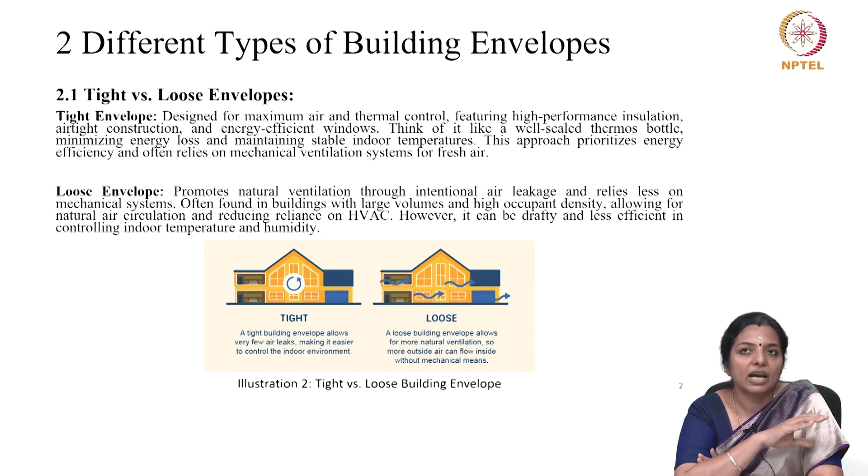So, let us look at this. There are two different types of building envelopes. One we call a tight envelope, and that is designed for maximum air and thermal control. Now it has very high performance insulation, airtight construction, and energy efficient windows. Think of it like a well sealed thermos flask, minimizing energy loss and maintaining a stable indoor temperature.

This approach prioritizes energy efficiency and often relies on mechanical ventilation systems for fresh air. Now, when I talk of all this, I have approached it from the point of view of the outdoor being very cold. Have the same analogy to understand what happens when the outdoors is very warm. The other one we will call a loose envelope.

So, a loose envelope promotes natural ventilation, it's porous, and it promotes breeze movement inside, which is actually an intentional air leak, and it relies less on mechanical systems. This is often found in buildings which are large volume and high occupant density, allowing for natural air circulation and reducing the reliance on any active means of heating or cooling like HVAC.

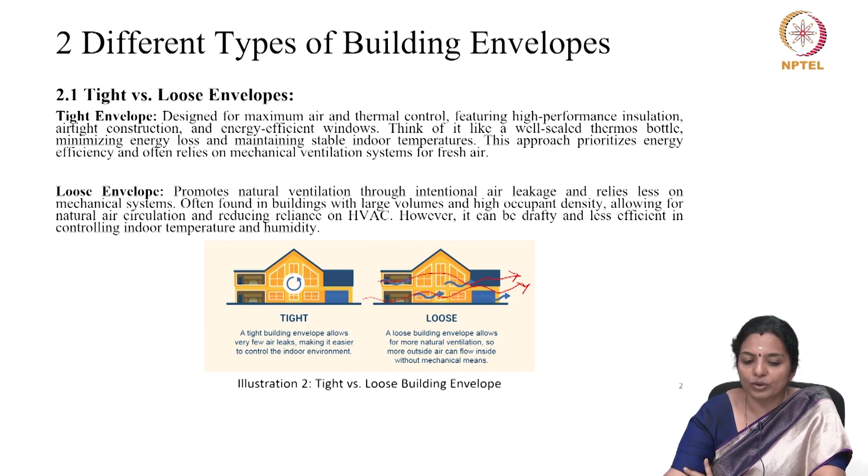Whereas there is another way in which you can see, and that is static and dynamic building envelopes. Now the building envelope comprises of walls, roofs, and all that is there on the walls, which is windows, ventilators. And these play a very critical role in the building's energy performance and an occupant's comfort.

Traditionally, envelopes have been primarily static, like how we use in our regular building. You have a wall, you have a window, you are privileged to have an operable window. When you want, you open the window. When you do not want, you close the window. When you feel very lazy, even though you have to open the window, you keep the window closed because you have to take an effort to go and open the window.

So, traditionally, these envelopes have been primarily static and they employ fixed elements and materials to achieve thermally comfortable indoors or to have a thermal control. So if you find that hot breeze is getting inside, you close the fenestration or the window. However, with increasing focus on sustainability and adaptability, now dynamic building envelopes are emerging and they are becoming a game changer in today's advent of technology.

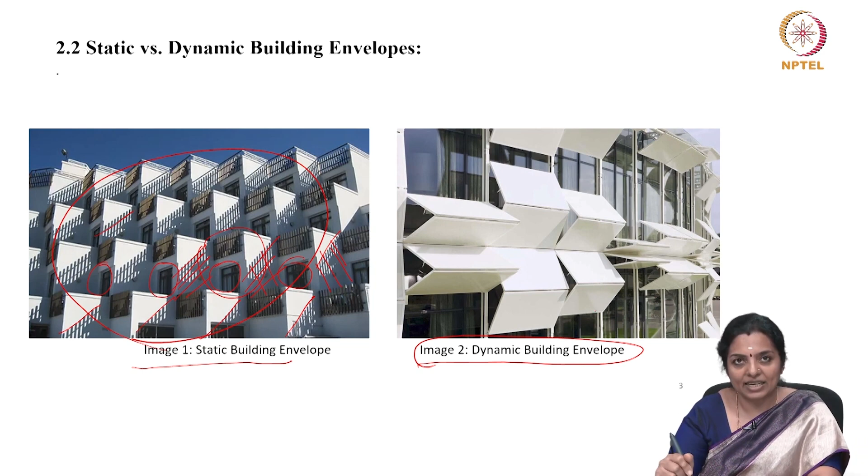Whereas now you look at the adjacent picture, which is the dynamic building envelope. Here you can see that the building has certain elements which are dynamic and movable. So the elements are movable, dynamic, and these can be made to move based on the daylighting and shadow, solar gain requirement.

Suppose it's a winter month and you want solar radiation to enter inside, all the windows could become as in this shape. Number 1, giving maximum exposure to the wall and allowing maximum solar radiation to come in. If you want to control the solar radiation, you can go in for option 2, where it is controlled. The area of the window through which solar radiation can enter inside is controlled.

If you want further control, you can go for option 3. And then if you want very less solar radiation and some amount of light, you can go for option 4. If you want very, very minimal or almost no solar radiation and extremely less daylight, then you can go for option 5. When I say you can go for, I mean to say that the facade chooses based on how you program it to allow optimization of daylighting and solar gain. So you have optimized ingress of solar radiation and daylight.

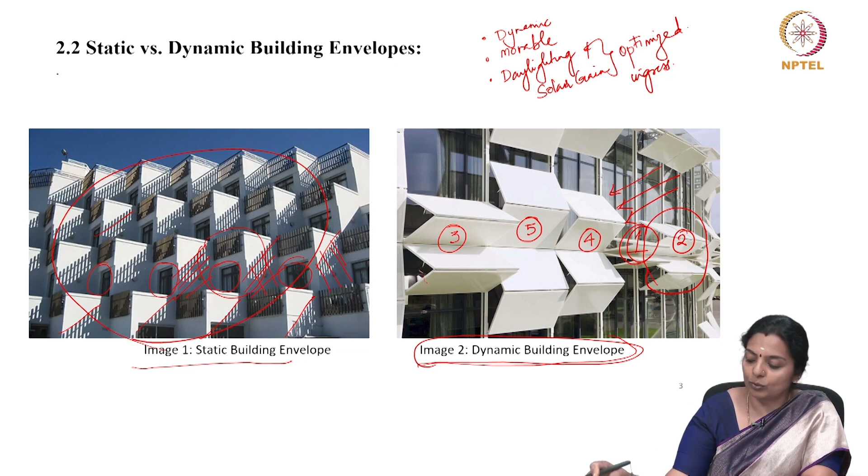Right. So now a static envelope relies on fixed materials and elements. That is, it has the traditional way in which buildings are built. It has a fixed wall, fixed windows, fixed shading device, and if you need any insulation, it is fixed, and it regulates heat transfer and light penetration based on the natural way in which solar radiation will enter in.

It comprises of high performance materials in the form of insulation to avoid infiltration, like fiberglass or rock wool or foam, and it minimizes heat flow through the walls, roofs and floors.

Now, airtight construction is done by sealing the gaps and cracks, and it prevents unwanted infiltration, and therefore the thermal performance gets improved. Energy efficient windows can be installed by having double or triple glazed windows, and their emissivity can be very low based on the coatings that you use on the glass, which will result in the nature of heat gain or loss that you would want in the building.

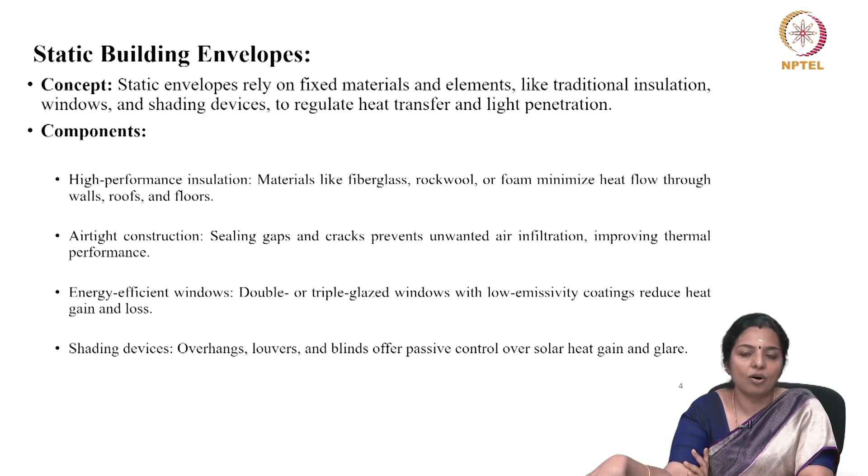What are its advantages? Now these are simple in design and the construction is very simple. These are conventional. They have static envelopes which are well established, and therefore they have been built over and over a period of time, resulting in cost effectiveness. It is low maintenance because it has fixed elements which require minimal upkeep. There is no motor involved in it. There is no mechanical system involved on the facades.

These are effective in stable climates, that is in regions with consistent weather patterns, because these static envelopes can provide sufficient thermal control. They do come with a disadvantage that they have limited adaptability. These kinds of static envelopes struggle to adjust to changing weather conditions as well as occupants' needs. Their potential for overheating or undercooling arises because the fixed elements do not respond to the changing outdoor climate or microclimate.

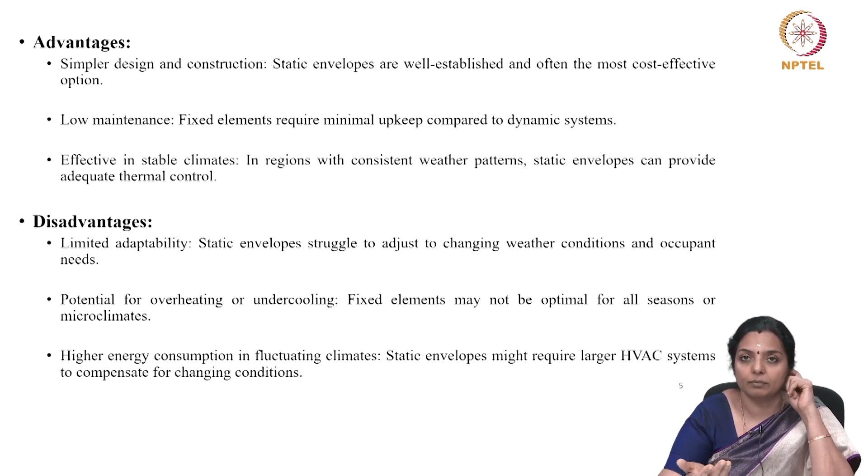Because of this, it can result in high energy consumption because the requirement of indoor cooling may become high during certain months, and the requirement for daylighting can become high for certain periods of the day or for certain times of the year. And all our focus on this is because these can become high energy consuming, and therefore the operational carbon and operational energy of buildings having this kind of envelope can keep on increasing.

What happens as an offshoot? This keeps on continuing. So operational energy keeps on increasing in these buildings, and therefore operational carbon also keeps on increasing in these buildings over a period of time. There is no provision to reduce it, and therefore as architects and designers we need to address this issue and ensure that we try to design envelopes which respond to outdoor climate and weather, so that the operational energy of the building is minimized, and once you minimize it, then over the years you will only have minimum use of operational energy.

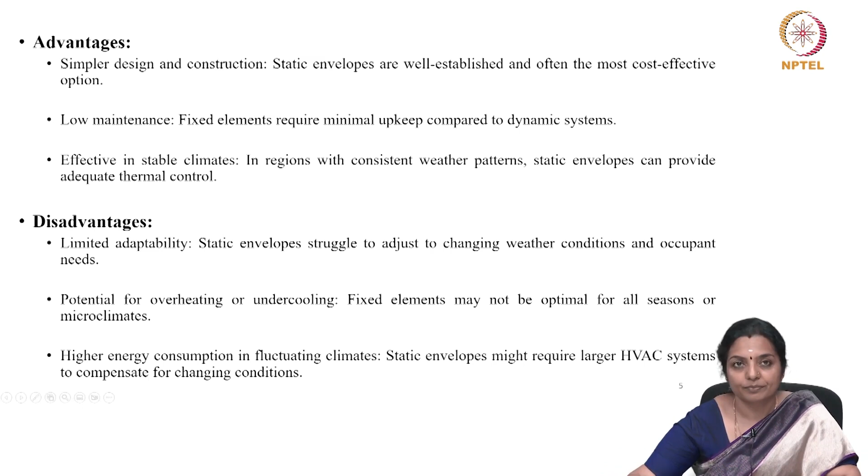Let us look at what happens in the dynamic envelope. Now, dynamic envelopes incorporate elements that will change when the outdoor environment changes, and as a response to the outdoor environment, say if the solar radiation is very intense and you want to cut solar radiation, then the building facade will respond accordingly. In a cold climate, when the solar radiation outside is intense, the envelope will allow the solar radiation to get inside the building. This kind of envelope also responds to an occupant's need.

The occupant can decide whether he wants the solar radiation to get inside the building or not. Therefore, the building performance gets optimized and the indoors remain comfortable. These have various components. The insulation is variable. So, you have materials like switchable glazing, you have electrochromic windows. Electrochromic windows will change the color of the glazing depending upon the solar radiation outside. When the solar radiation increases and you do not want ingress of solar radiation, the glazing becomes darker.

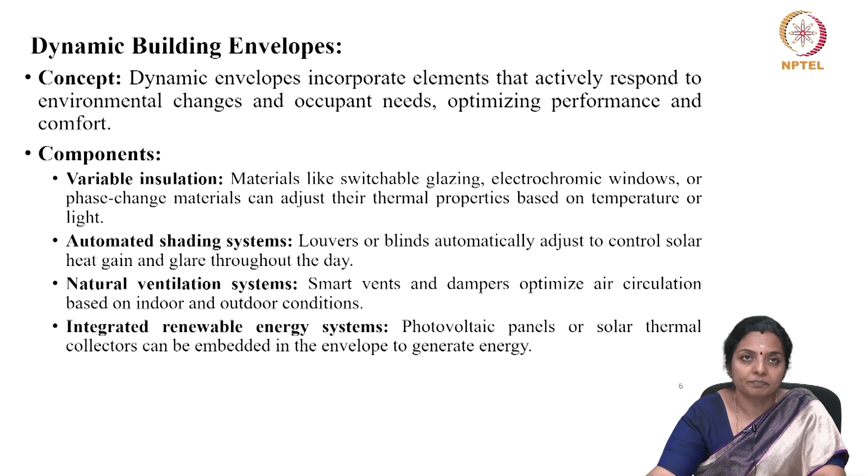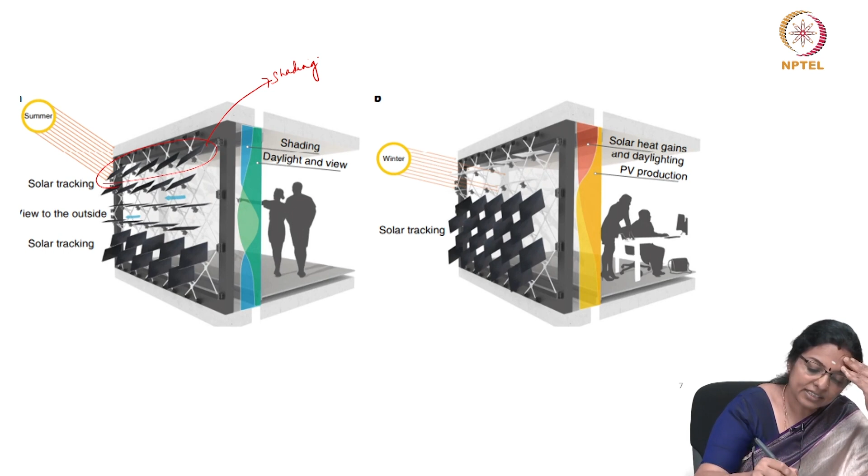So, now you can have a dynamic photovoltaic building envelope. If you look at this figure, all that we had talked of so far features here. You could have devices, you could have shading. Suppose this is a shading device. Then based on your requirement, in the summer, this shading device closes itself, thus preventing solar ingress, preventing solar gain, because it's summer outside.

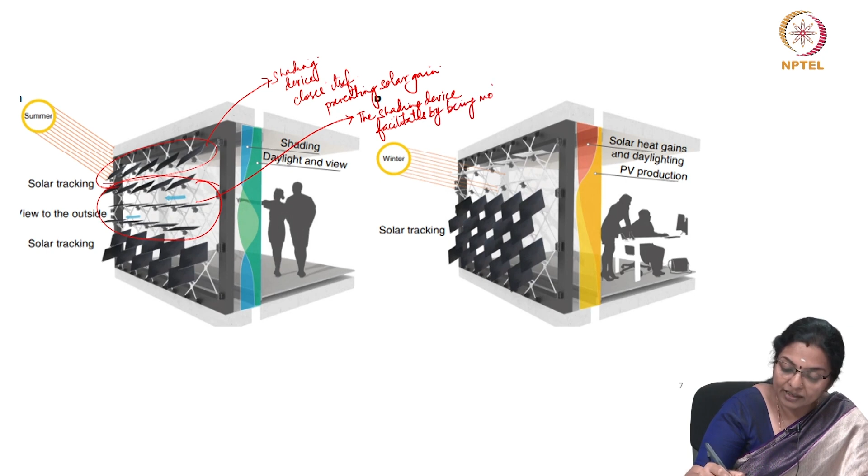Suppose you want to have some view outside, the shading device facilitates by being mobile, and you have a lot of view to the outside. The shading device could also be placed such that it tracks the sun's direction. So, since it is summer, and if this is the solar radiation angle, these solar panels, which are also a shading device, track the sun's direction and tap the maximum amount of solar radiation.

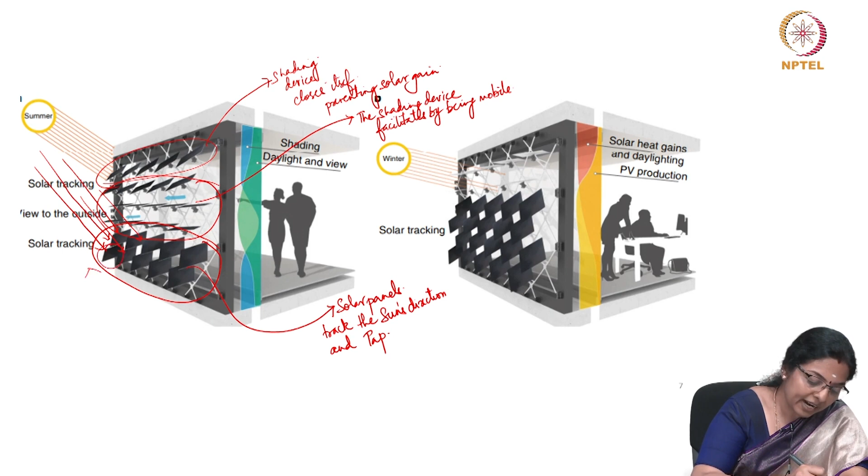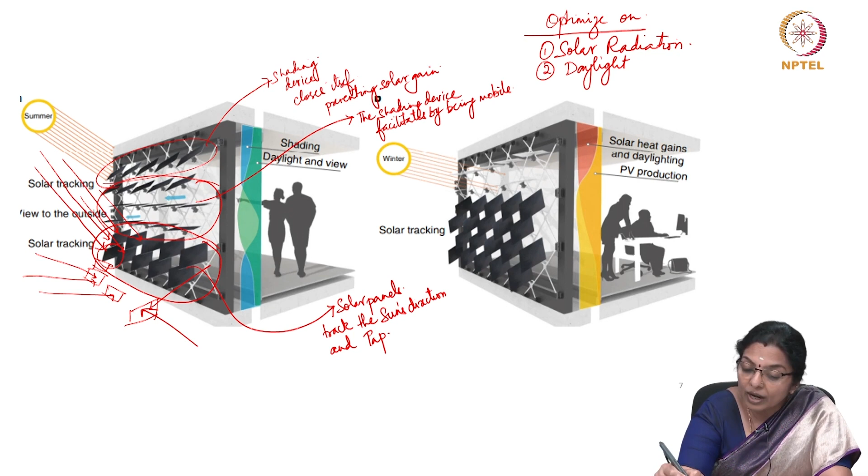If the sun moves, this could also rotate and move this way. If this is the solar direction, then it can move this way, and therefore this kind of a dynamic envelope for a building like this will optimize the ingress of solar radiation. So, you can control how much sun you want to enter inside the building to make the building warm, or daylight. You can control how much you want the opening to be to allow daylight and glare. And third is tap solar energy.

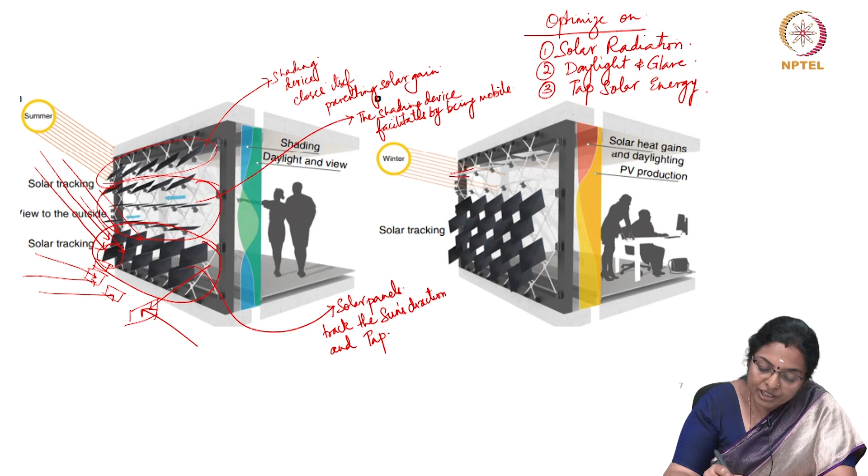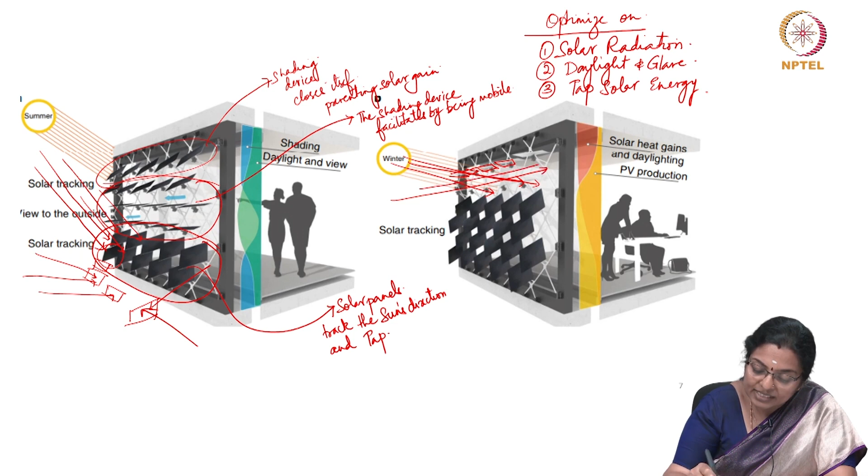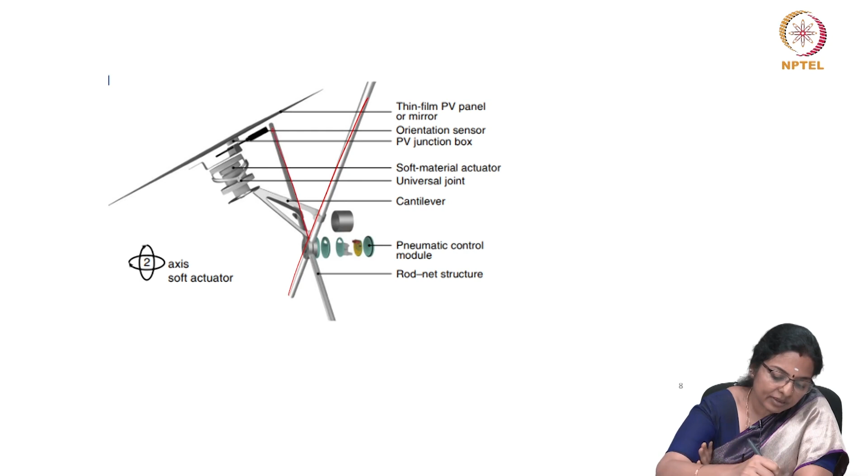So, a dynamic facade can do all of these, and in the winter you can position your openings such that you allow the winter sun to get inside. You allow daylighting to enter inside, and you can also position the panels so that it tracks the sun's direction and taps it to the maximum possible. So, this is how dynamic facades will function, and accordingly you have small motorized or mechanical systems which will facilitate it. So, the building envelope will consist of individual modules which will be mounted on rods like this, which you have seen in the previous slide.

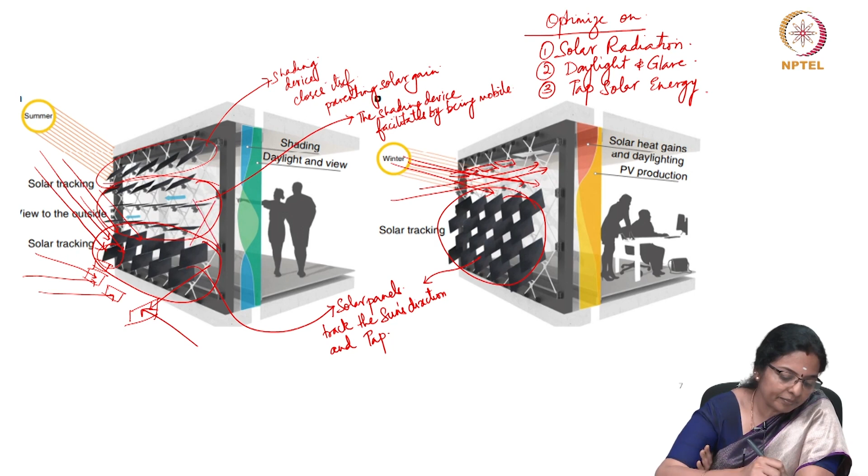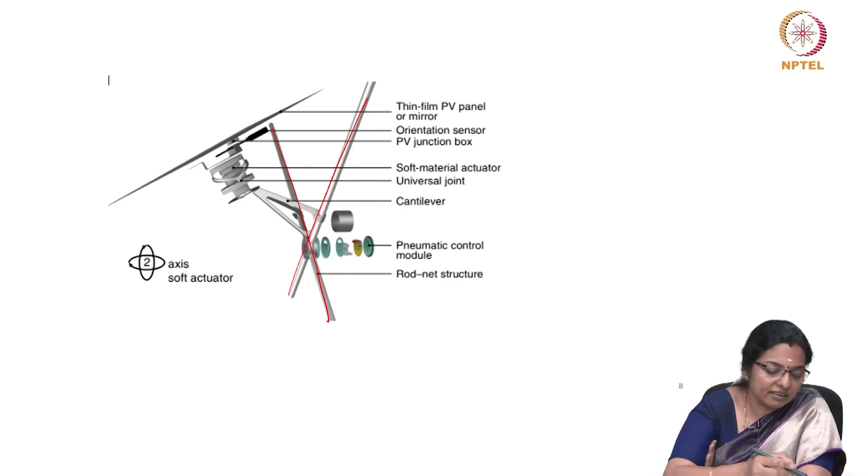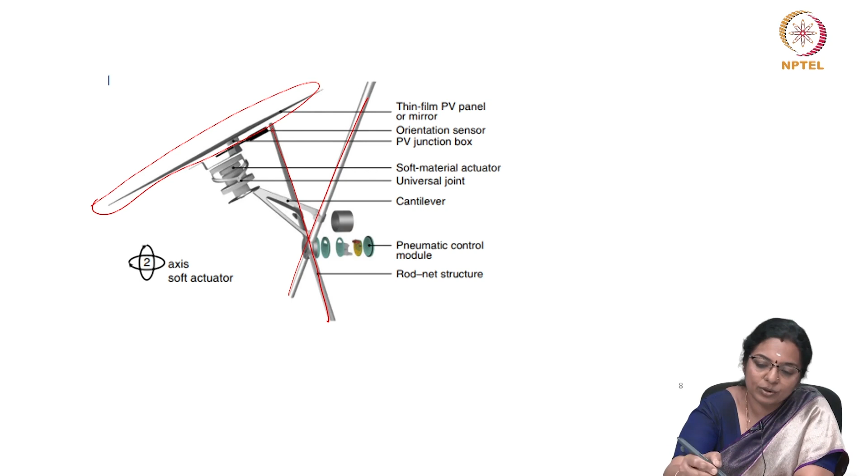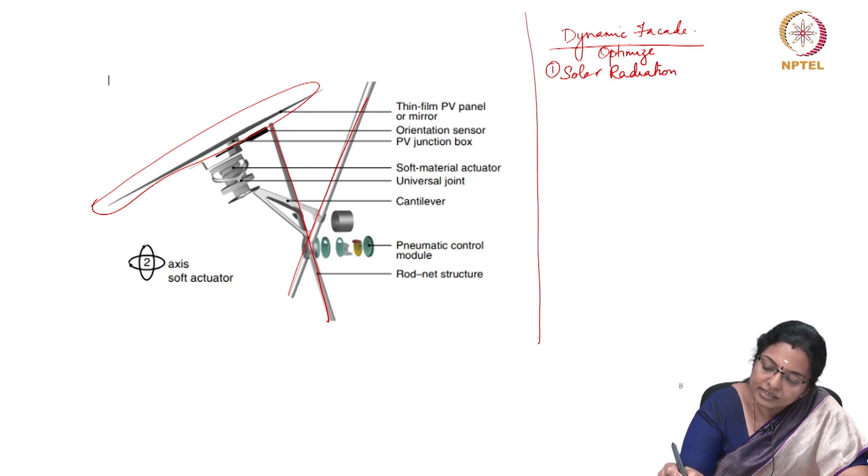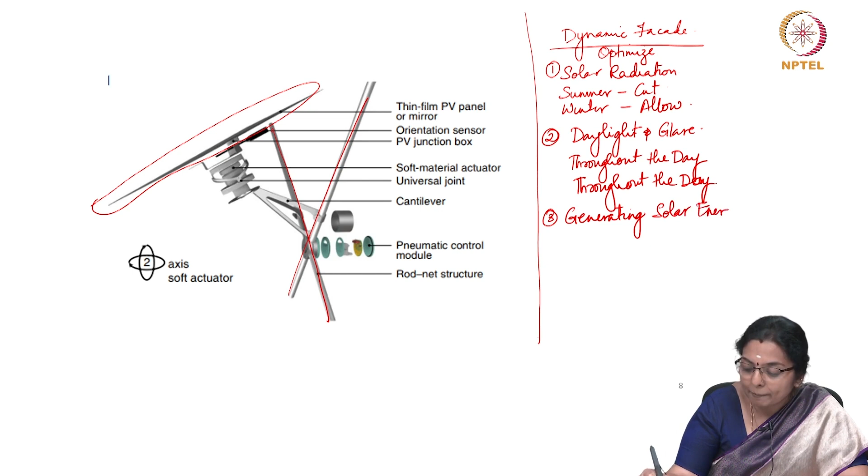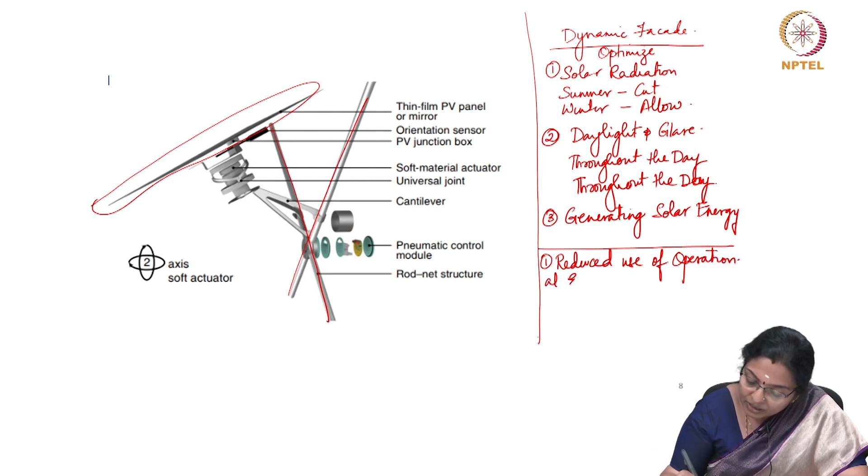You can optimize daylight and control glare throughout the day as well as throughout the year. Besides, you also have an option of generating solar energy. The impact of all these three will be on reduced use of operational energy. The energy required to facilitate a building's indoor thermal condition will get reduced, and this will result in reduced operational carbon throughout the life of the building.

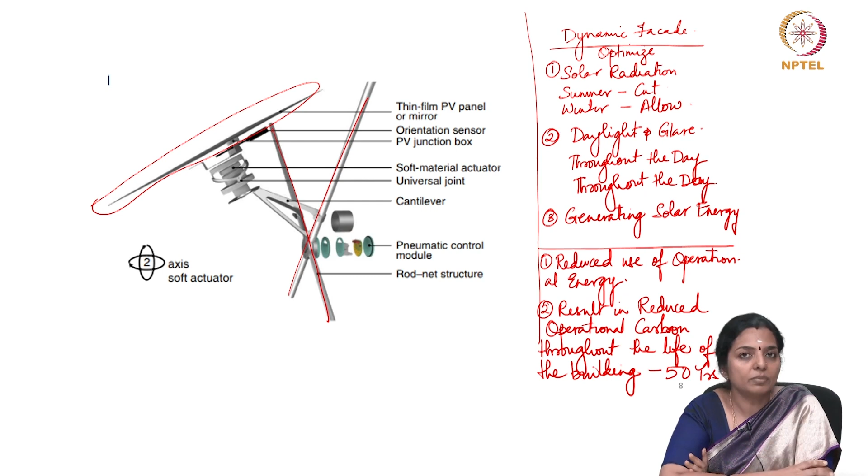Throughout the life of the building, lasting for at least 50 years. Imagine the amount of reduction in carbon dioxide emission due to this, and therefore imagine the positive impact it will have on the environment. So, we will stop this class today here with this brief introduction about envelope, static and dynamic, how these are related to operational carbon, and how these can aid in reducing operational carbon by controlling the ingress of solar radiation, daylight, and even generate solar energy. So, we will stop with this and continue in the next class. Thank you.